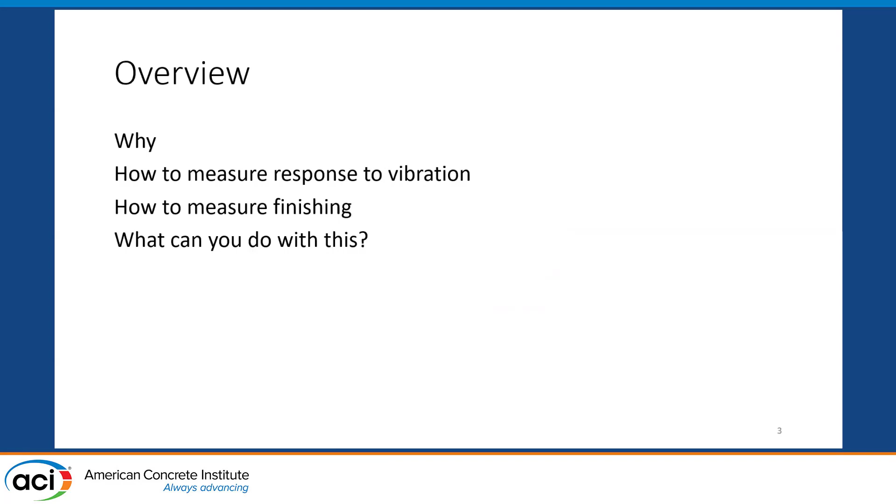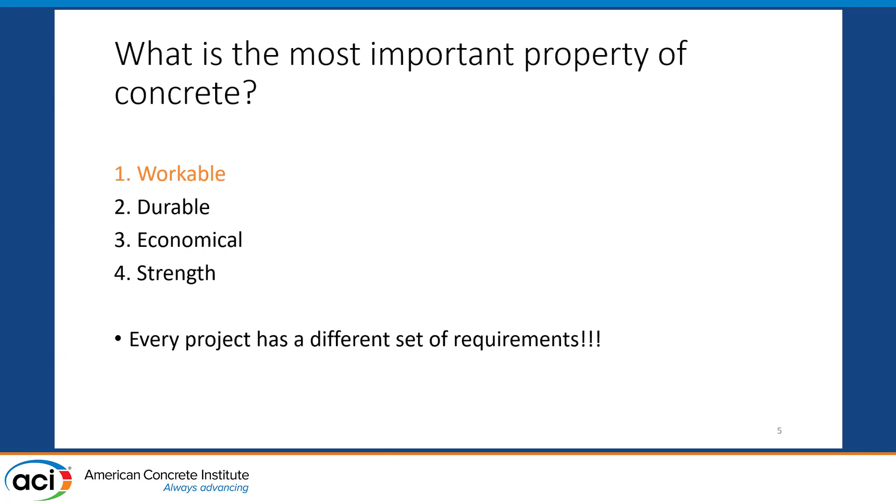By far, because if you don't have workability, you are not going to get durable concrete, with massive voids, massive cracks, massive things inside. You will not get economic concrete—you're going to have to rip it out and put it back in, and that's the least economic concrete there ever is. And then you will not get strength, because air is not very strong. So every single project has different requirements, but if you don't have workability, you have nothing.

When it comes to how to design concrete mixtures for workability, I think this is a new mindset, a new focus we need to have as an industry. The slump test was great in 1911—Abrams, one of my heroes, came up with it. But we can do better than 1911 technology, right? We need to start thinking about how slip forming, truck placement, pumping, flat work, etc. work, and design mixtures or test methods that give us some idea about that.

Now, we have plenty of people who've been doing this for a long time. They're extremely experienced, and they can look at a mix and say, that'll pump, that'll pave, that'll whatever. That's amazing, that's awesome. But wouldn't it be great to have a scientific test where we can quantify, compare, see, measure, see what's going on?

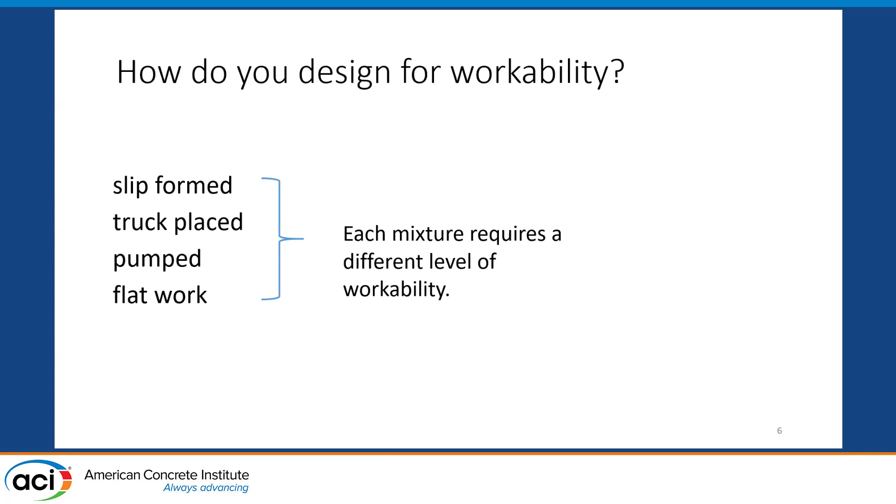We all know there are three different levers we can typically pull: we can change our paste content, our water to binder ratio; we can pull our admixture level; we can pull our aggregate level. But how do we know which one? How do we know how much? That's what I'm going to talk about at the beginning, to help you with some of this.

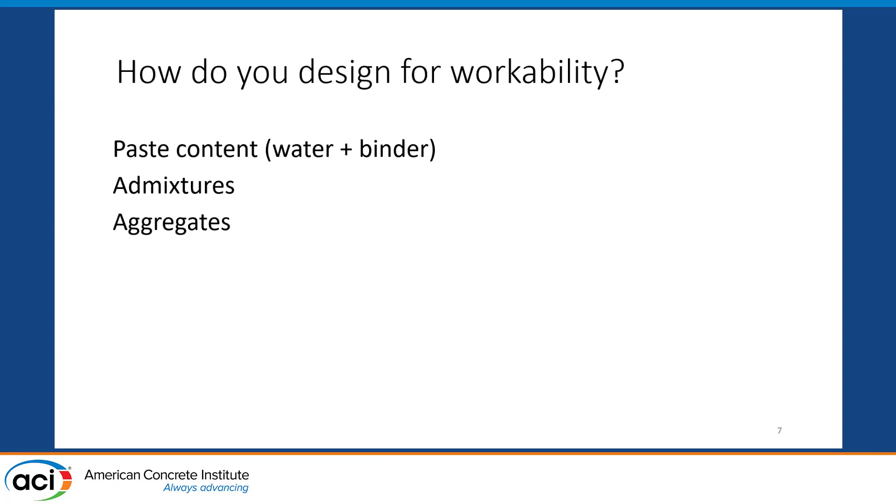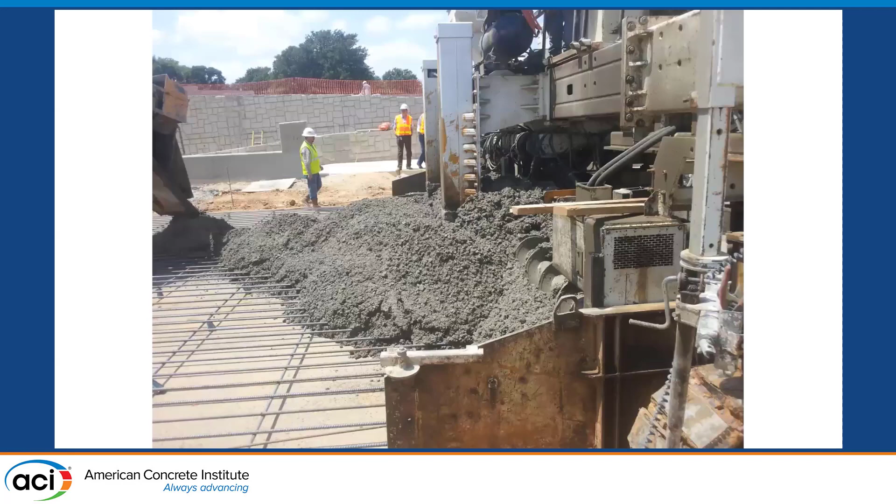Again, we've been working on coming up with tests that look at how you place it, drag it, pump it, vibrate it, finish it—all the workability practices we do. We'll start with pumping, or with paving, because that's what this session is all about. How do we know if we can take a mix that looks something like this before the paver, and after the paver turns into something like this?

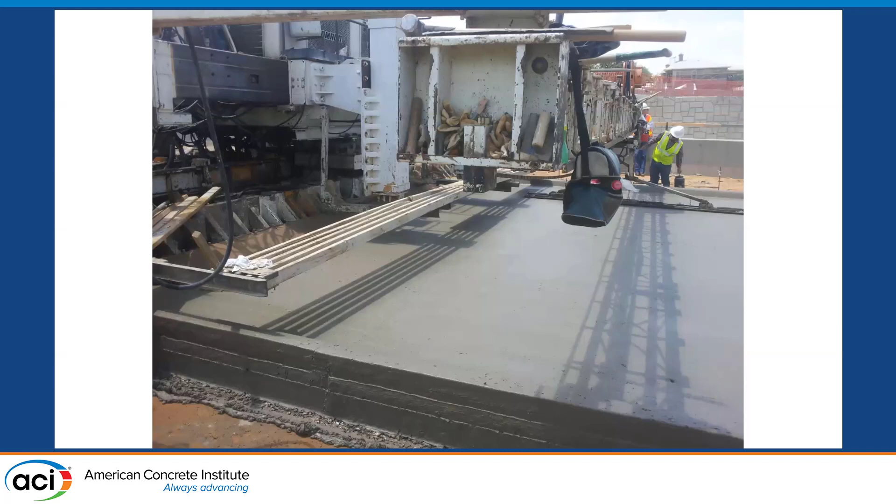Now, the goal here is we want a window of workability. We don't want it to be too workable, because if it is, it won't hold an edge. We don't want it to be too stiff, or it won't respond to vibration. We want the middle, and we also want it to be able to finish.

I mean, this is amazing—we can take people off the back of your crew and have them work in other parts of the job, because by touching the concrete, you're ruining the ride. That's what you can get when you dial these things in. That's possible to focus on.

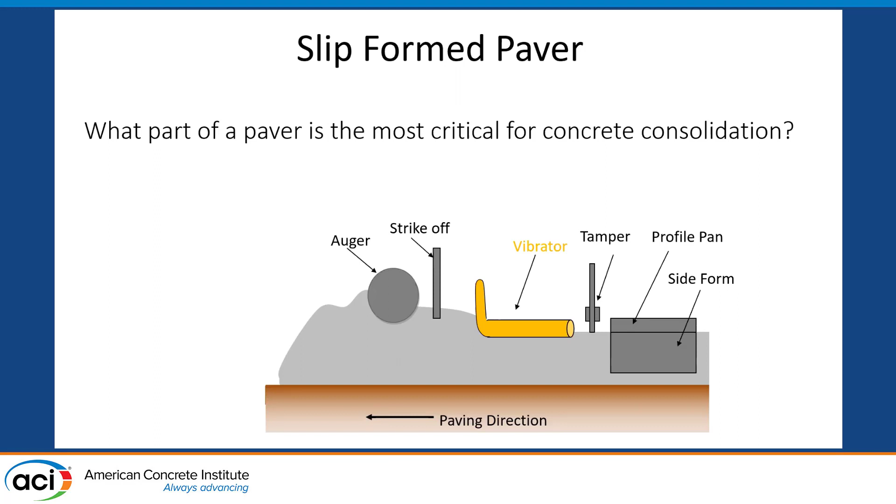But if you look inside the slip form paver, what it's all about, what it's doing—the vibrator is doing a lot of the important work, consolidating the concrete. We need to understand how that concrete responds to vibration. So we want a test that's simple, because if it's complicated, it won't work. No one's going to use it, right? It's got to be extremely simple.

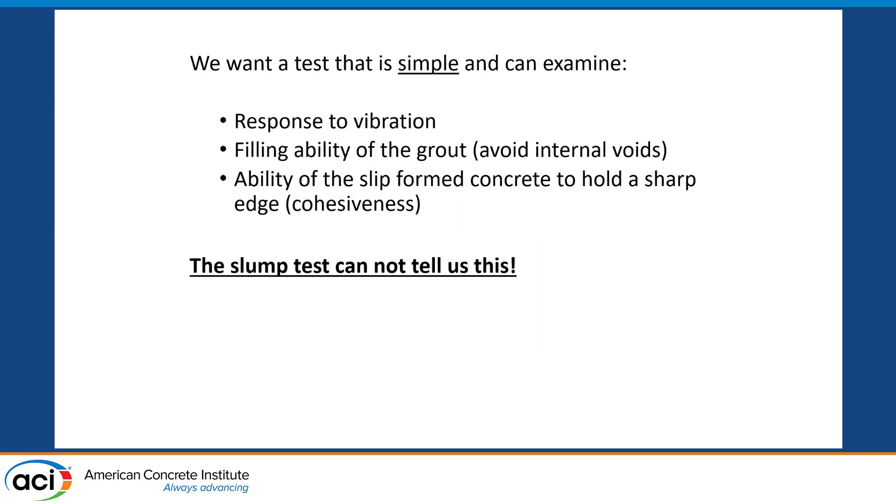It needs to measure the response to vibration. It needs to look at the filling ability of the grout. It needs to look at the ability to hold the edge, this window of workability. The slump test was cool and all, but it didn't tell us about any of this stuff. So we came up with a box test.

It was 14 years ago when I was doing a project for TxDOT, and I was sitting in my shower thinking about it. The goal was to use the lowest cement possible, and I was shaking in my boots, because how are we going to come up with a really low slump mix, a low cement mix, that can really pave?

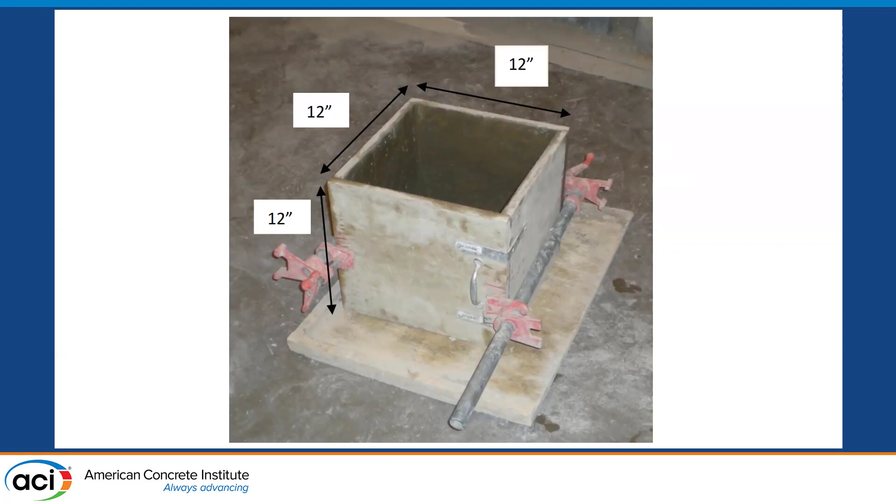We said, what if we did something like this? What if we mimicked the response to vibration? What if we used a 12-inch by 12-inch by 12-inch box, held together by pipe clamps? These are two L's, open top, open bottom, held together by pipe clamps. The pipe clamps used to be $20, I think they're about 35 these days. Everything's going up in the world. Still not a very expensive test, very simple test that you can run. This is an AASHTO test, and I think it's going to become a full standard now, which is awesome.

You add 9.5 inches of unconsolidated concrete to the box. You take a 1-inch stinger vibrator, you turn it on, count to 3 as it goes down, count to 3 as it comes out. How did that come to play? Well, we did a bunch of math to figure out how much energy we could put into that box to match a typical paver, at a typical frequency, at a typical speed. That's the same amount of energy.

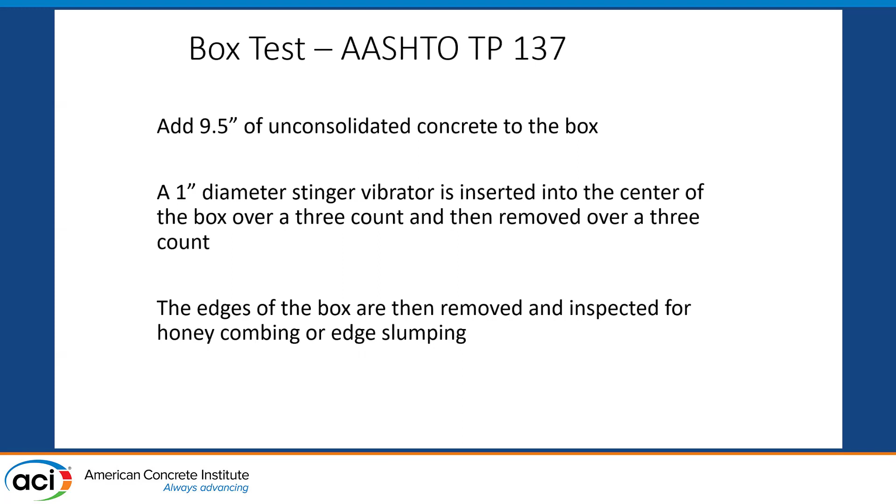We immediately take the pipe clamps off, pull the edges off, and look for honeycombing and edge slumping. Let's see pictures—looks like this, there's the box, there's a vibrator going in, and you can hear it. Whoa, my gosh, you can see around the outside that concrete has gone from not so consolidated to consolidated. We're measuring the sphere of influence of the vibrator head, that's what we're doing in the lab. Very simple, very easy to do.

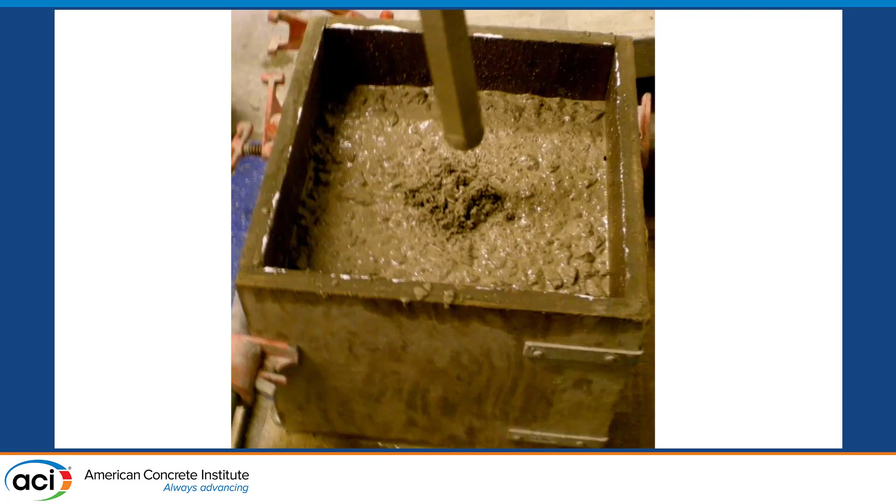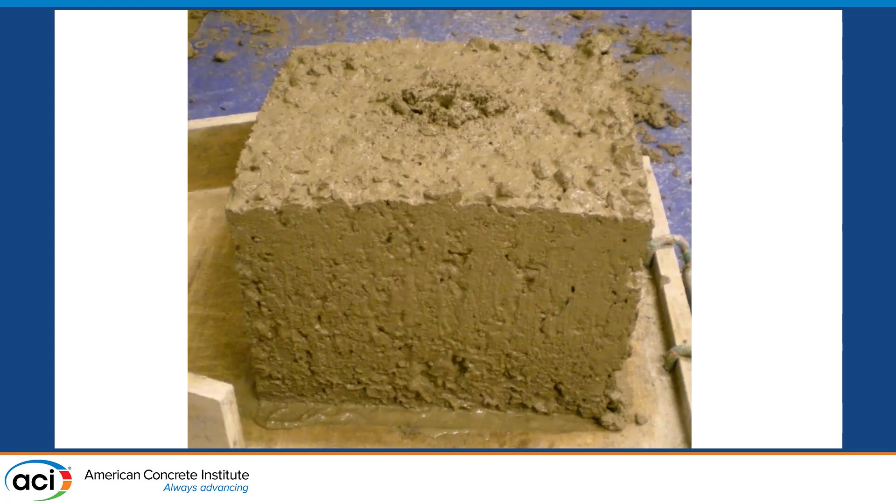What goes on if you don't consolidate the concrete—once you take it off, you'll see honeycombing. So you take the things off, immediately pull the edges off, and it looks like that: like a box of concrete brownie, call it whatever you want. That's what I call it. We're looking for honeycombing and edge slumping.

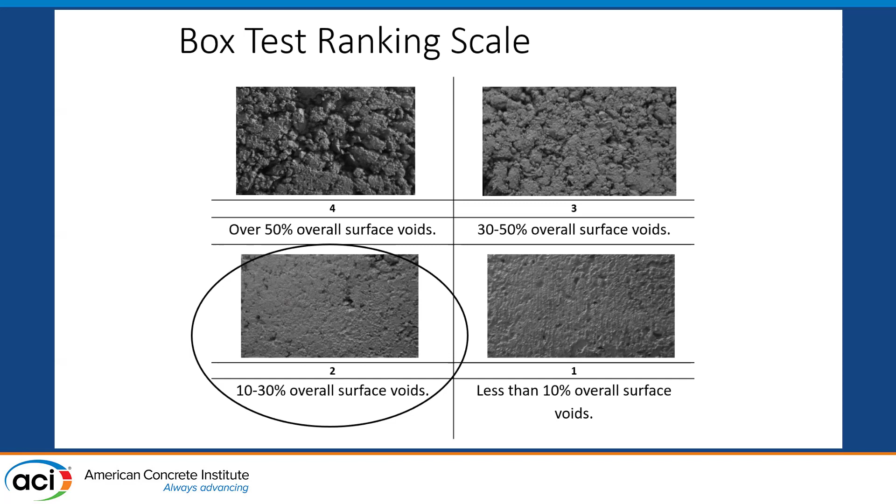So we use a visual ranking. Why visual ranking? Because it's simple and easy. You can see with your eye—we're looking for something like around a 10 to 30% overall surface voids. You can go around and take pictures, look at each side, and come up with an average ranking for that box.

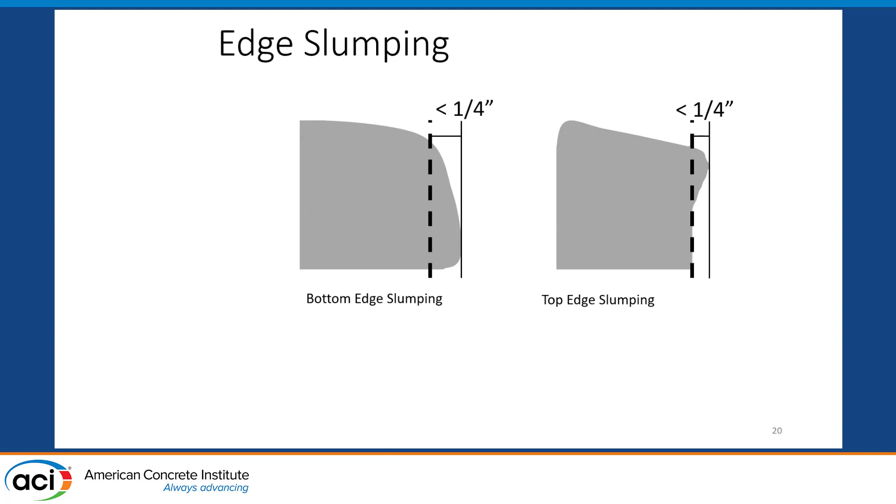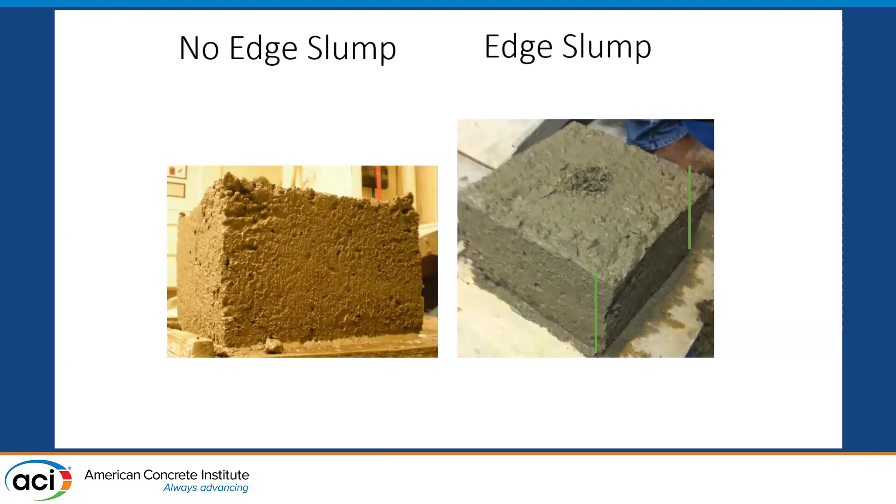You also look for edge slumping. Is it edge slumping at the bottom? Is it edge slumping at the top? Because again, we want that window of workability with our concrete. Here's some examples: one with no edge slump on the left, edge slump on the right. You can see the top coming over, up—either too much paste, too much water reducer, too much something in that mix on the right. We've got to back it off, we've got to get it right.

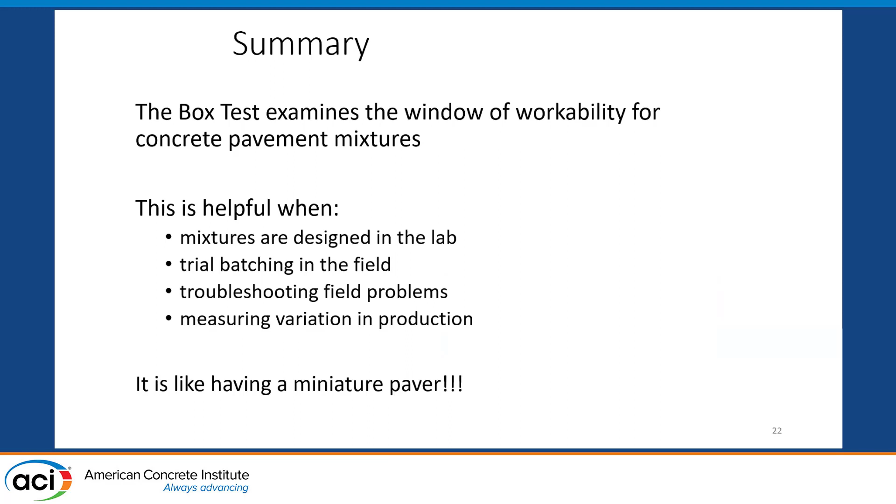So in summary, the box test looks at this window of workability. That's why it's powerful—it's helpful when you're designing mixtures in the lab, when you're trial batching in the field, when you're troubleshooting, when you're measuring variation. It's like having a miniature paver. It's pretty sweet, you can take it around with you.

Let's talk about the float test next. So response to vibration is awesome, but how does it finish? This test will work on paving, it will work on flowable, it will work on whatever you want. The last test was just for slip form paving concrete or slip forming in general, barrier wall—the box test is also helpful for that. How does the concrete respond to finishing?

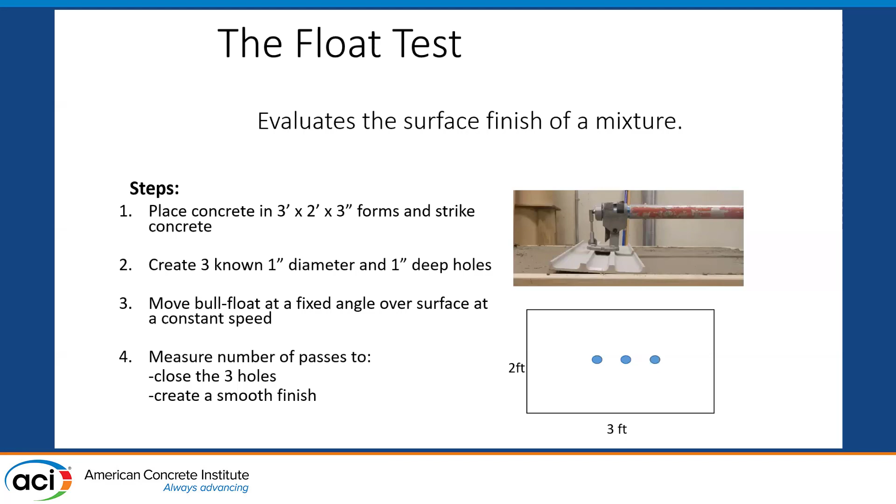We're going to take some simple forms, 3 foot by 2 foot by 3 inches deep. We'll fill them full of concrete and strike it off—we don't saw it, you strike it off the top, making sure it's full. Then you come back and create 3 one-inch diameter, one-inch deep holes. Why do we do that? Often in the field, when you strike concrete off, you pluck out coarse aggregate, and it's the finisher's job to fill those aggregate holes in. We want to know how hard is it to finish the concrete to make a smooth surface, but also fill in those voids. We move a bull float over at a fixed angle and constant speed, and measure the number of passes it takes to fill in the holes and create a smooth finish.

So that's cool and all. Let's look at pictures. Okay, there it is. There's the concrete in the forms, right?

Place and finish. There we go, where we take our template, where we create our 3 1-inch diameter holes, again, simulating coarse aggregate being plucked out.

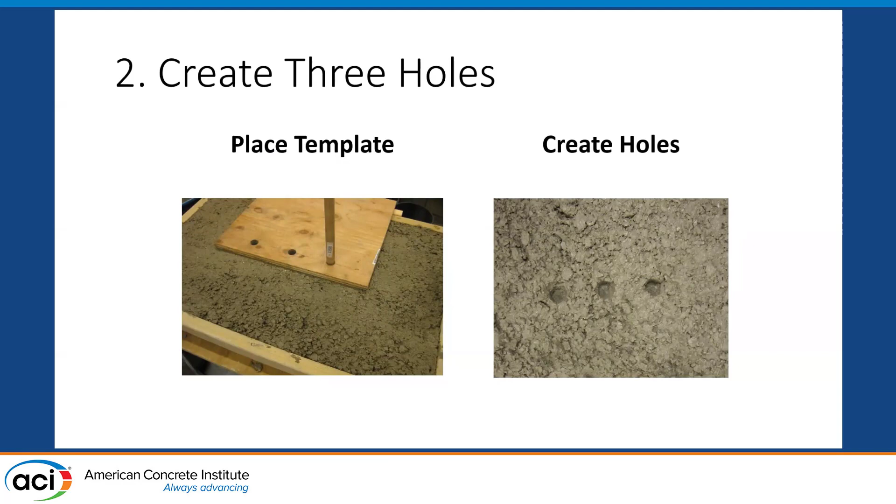And now we're going to measure, we're going to actually start to run the test. So we have a yoke there. See that yoke there? So we fixed angle. We have trimmed the float so it only rides on the concrete, does not ride on the forms, right? And then you go back and forth.

You say, how many times back and forth does it take to create a smooth surface? Now, we don't measure the edges. We just measure the dead center.

You might ask, how in the world, Tyler, do you move at a constant speed? Well, thanks for asking that question. We actually make little marks on the side, and the person running the test wears headphones. They have a drum machine going, a click track. It's going at a constant speed. And they know every time the beat hits, they hit a line going forward. And every time the beat hits, they hit a line going back. That's how a human very easily can run things at a constant speed.

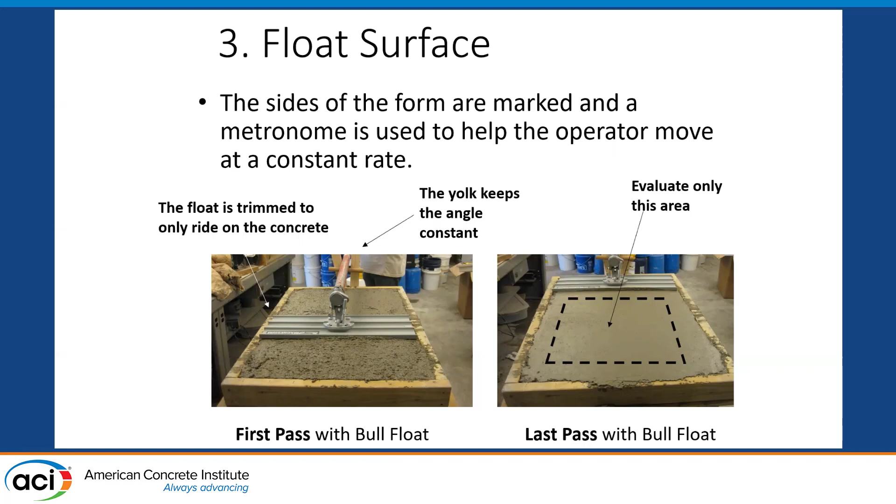Remember, we're simple people. We do simple things, right? And you might say, well, why do we do that? Well, because we're freaks, right? And we want everything to be as constant as we possibly can in the test.

Let's look at some examples. Here is 0 passes on the left. There is 2 passes and 4 passes. You can see the holes closing up. Again, 6 passes is kind of the breakover line: if it's below 6, that is some really easy to finish concrete. This does not correlate to the number of passes in the field, it does not.

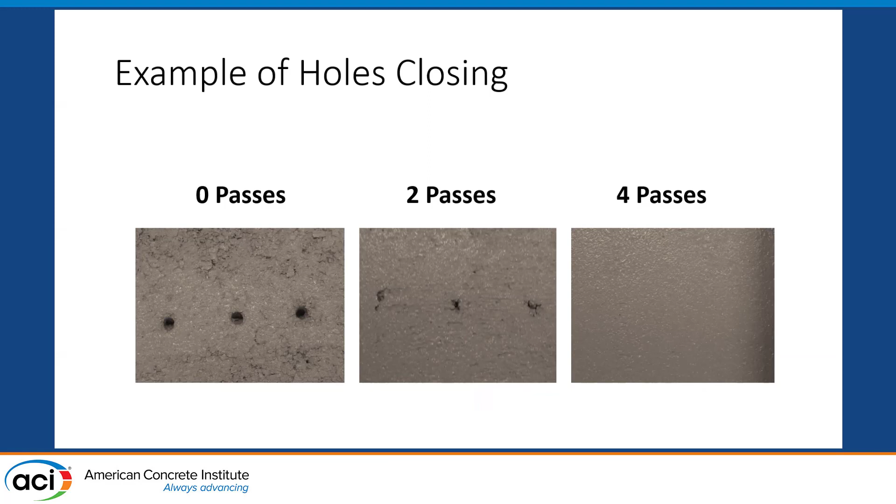But if it's less than 6, it's going to be pretty easy to finish. If it's less than 10, it's moderate, and then above there. And then here we go.

Here's when we look at actual surface texture. And again, we're not looking for perfection. We can deal with some surface voids. 10 to 30% overall surface texture is okay and ready to go.

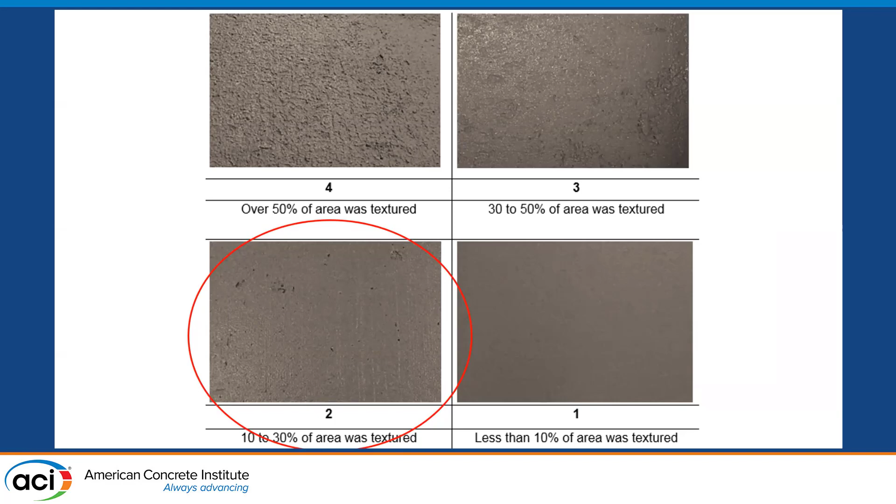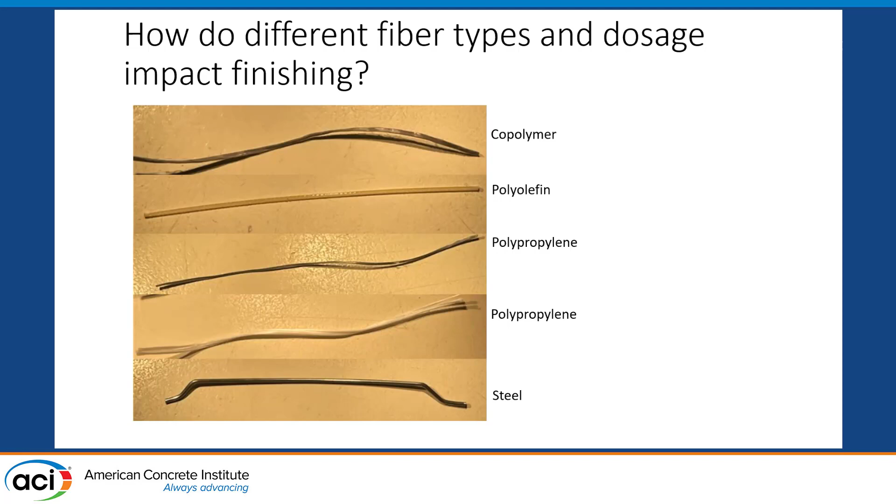So let's apply this bad boy. Let's use this to answer an important question. Has anyone ever wondered how fibers impact the finishability of concrete? Has anyone ever wondered that? There's all these different fibers out there, right? I mean, I'm showing 5 different ones, different types, different whatever. What if we could measure that?

Well, oh man, it's coming your way. All the concrete mixtures I'm about to show you have the exact same everything, except for different types of fibers and different dosages of fibers. Water reducer dosage is the same. Water cement ratio is the same. Gradations are the same. Everything's the same, but we're changing the fibers. And we're going to use the float test to actually compare performance.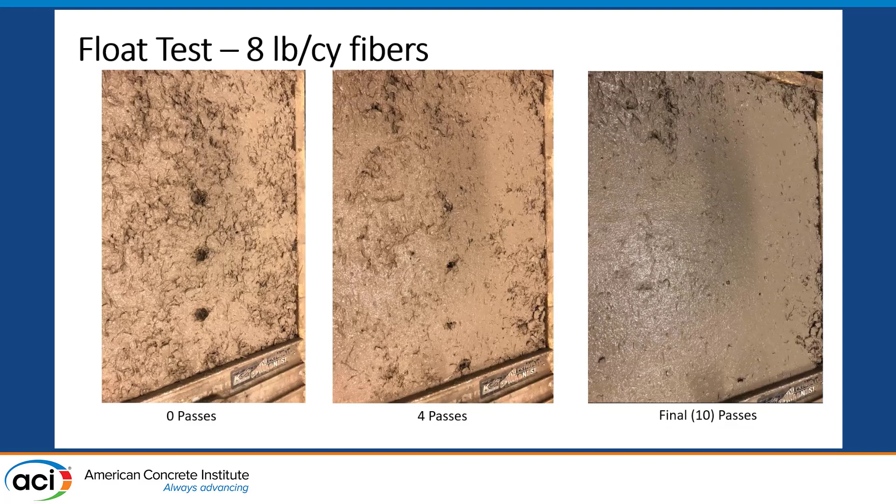That makes sense, right? Now let's go up to 12 pounds per cubic yard. Here's 0 passes, there's 4 passes. Now who in their right mind would specify 12 pounds per cubic yard? Oh, I see it. I see it on jobs. Maybe not 12, but I see very high amounts of fibers on jobs. And it's a person that doesn't understand finishing that does that.

What if it would be cool to have a test that could show them and compare and evaluate different products out there and how they finish?

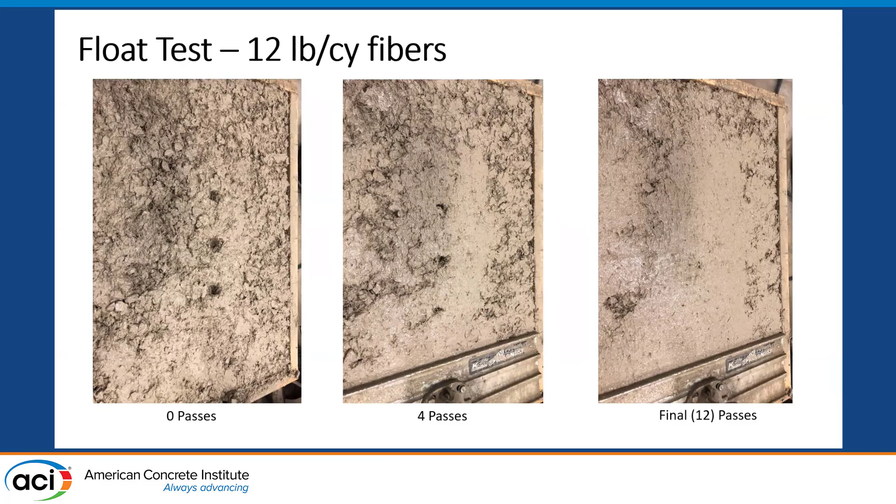Now, one cool thing about this is we could do this for all different types of fibers. So I know there's a lot going on this slide, and I don't even know how to make the mouse appear up here, so I'm just going to dance around and point. On the far left, the black bars with no fibers in it at all—0 fibers. You can see it took around 6 passes for that mix, and you have a green line that goes all the way to the right. And then these are different types of fibers that are out there, all right?

And then there's a low dose, a medium dose, and a high dose. Hopefully you can see as you go from the low dose to the medium dose, typically the number of passes required goes up. Makes sense, right? And then if it gets above this poor line, that gets really bad. Some of these are so bad they would not finish - as you go back and forth, you would tear the surface open again and again. It's a problem, so you need to be able to control these things.

Now, what can we say? As fiber dosage increased, finishability typically decreased. But we can also say not all fibers finish the same. Some of these, like this M4-C, even at 8 pounds per cubic yard, did great. Some of these, just straight M4, actually required - would be poor.

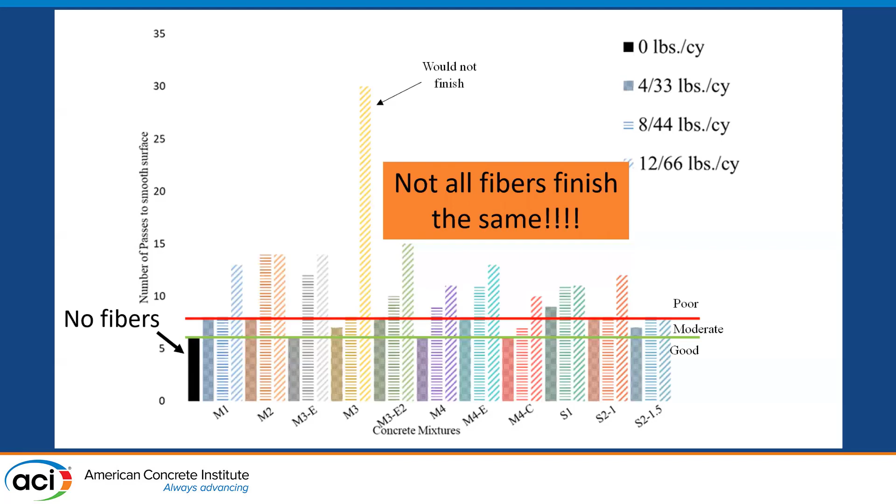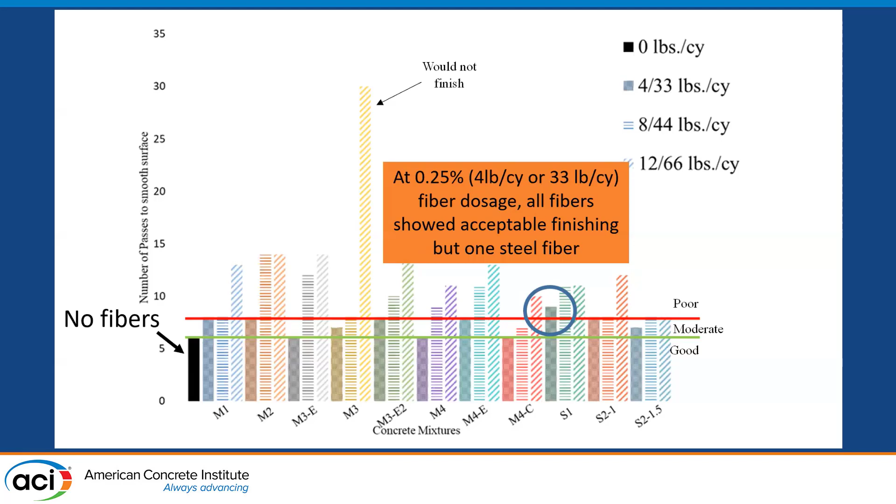People would cuss - oh, I'm not supposed to say that in ACI, right? Oh, the cuss words are bad. I can say cuss, okay, never mind. But usually at 4 pounds per cubic yard, the lowest dosage, all the products looked at performed pretty well, except for one steel fiber, right? One steel fiber did not. And we could talk more if you want to talk about what fibers are good or not, and we'll go from there.

The float test is a useful tool to use in the trial batch to ensure mixtures are workable. 4 pounds per cubic yard of macrosynthetic or 33 pounds per cubic yard of steel is typically a safe volume to allow fibers to be finished. Higher dosages are challenging, but they can be done.

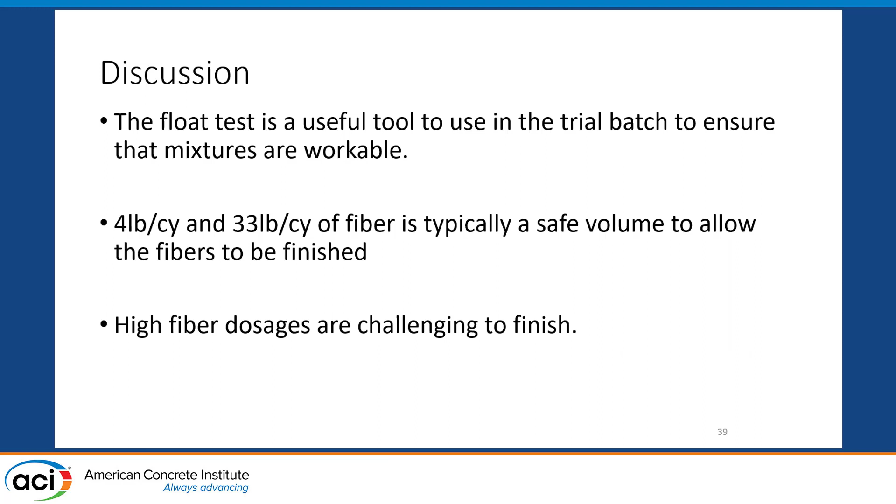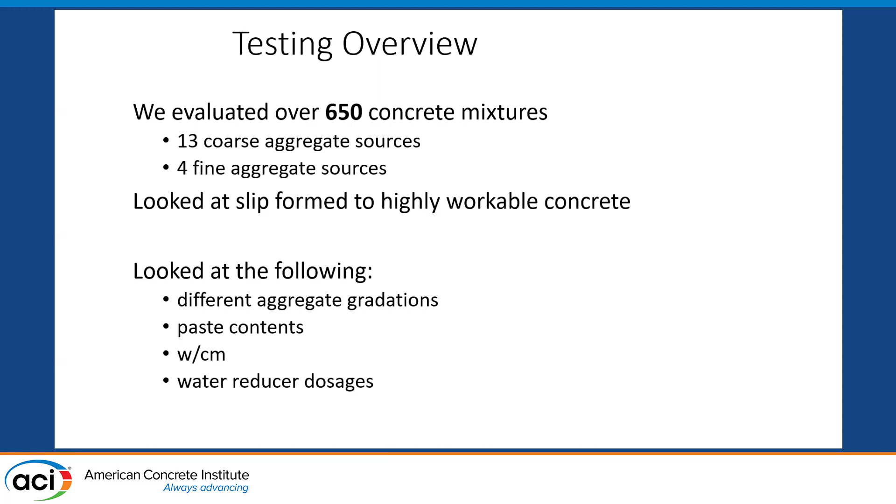I do want to make a plug for the tarantula curve. That slide looks a little bit weird. We used these two tools and a lot of other tools to actually look at 650 different concrete mixtures, a lot of different coarse aggregates, fine aggregates. We've looked at slip form paving all the way up to flowable concrete, and we looked at gradations, paste contents, water cement ratios, water reducers, and we can summarize more than $1.5 million of research with this, the tarantula curve. This is your combined gradation curve - your sieve analysis is down here at the bottom.

And then there is a coarse sand check and a fine sand check. People often leave those out. Those are really, really important checks where you want to be. I hope you know something about the tarantula curve, heard about the tarantula curve. If not, I'll give you some free resources coming up about that.

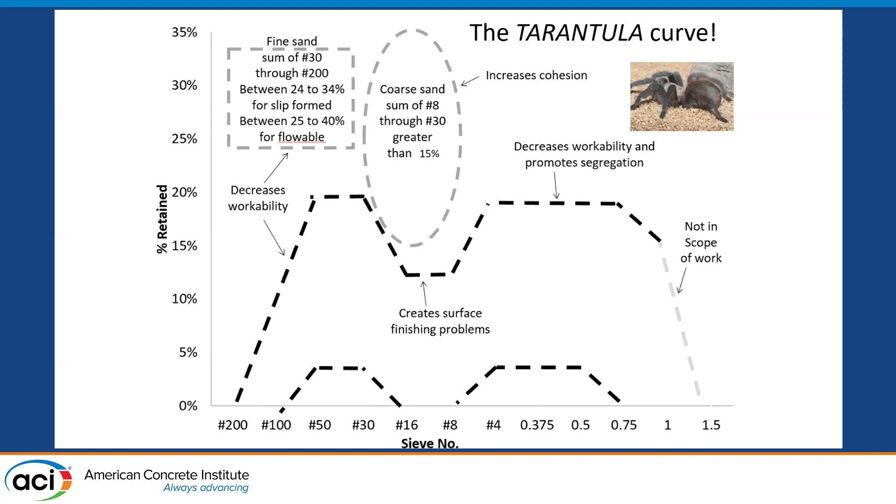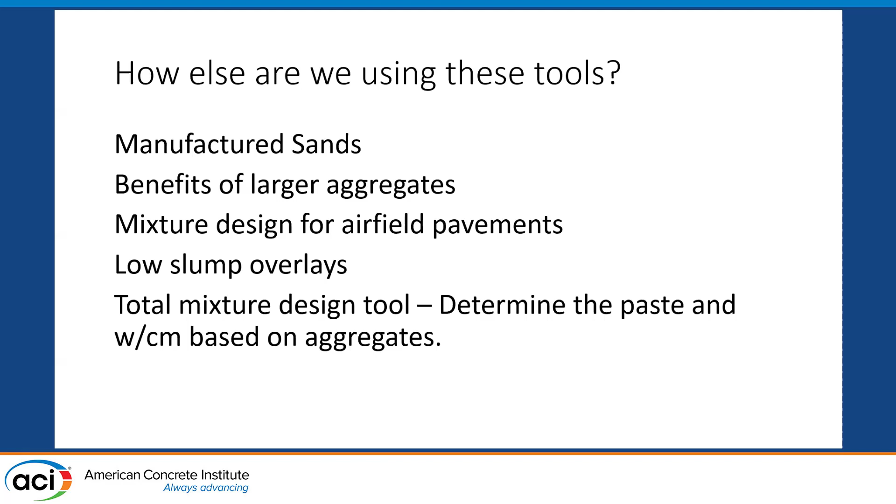But how else are we using these tools? Well, we have redesigned the tarantula curve for manufactured sands - that is pretty cool. We have looked at benefits of larger aggregates like 1.5, 2-inch stone. Is it worth it? We've quantified that, looked at that. We're doing mixture designs for airfield pavements right now, which is exciting. Low slump overlay stuff, and we're working on a total mixture design tool - everything for paste, water cement ratio, all based on your aggregates. So stay tuned for more stuff coming.